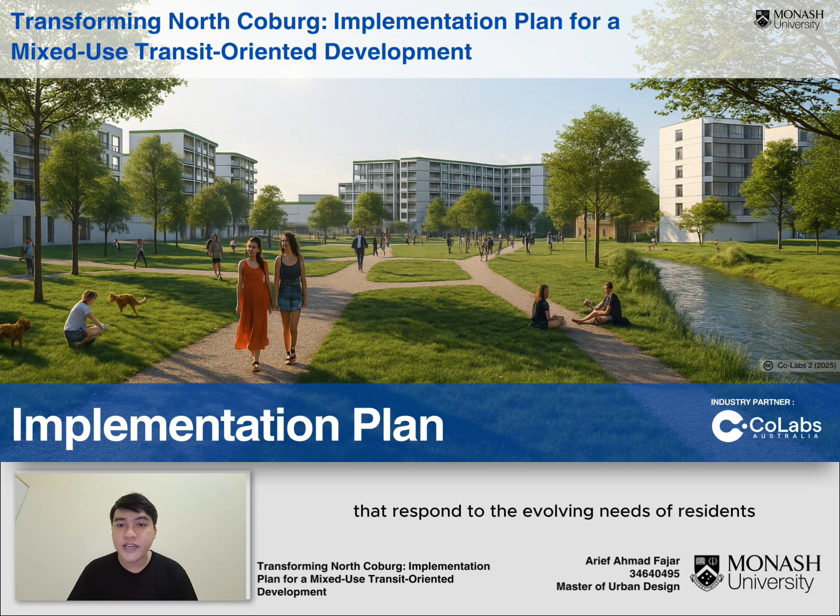Hello everyone. Today I'm presenting my implementation plan for a mixed-use transit-oriented development in North Coburg. This project, developed in collaboration with CoLabs, is not just about buildings, it's about creating a resilient, inclusive, and sustainable urban precinct that responds to the evolving needs of residents, commuters, and businesses.

Let's begin with the problem. In many urban areas, commuting is a daily burden. According to Real Insurance's 2022 report, over one-third of Australians still prefer working entirely from an office, while nearly 30% want a hybrid model. This tells us physical spaces still matter, but they need to be better integrated with our lifestyle. Our project addresses this by creating a place where commuting is enjoyable, not endured.

Our challenge question was: how might we develop a transit-oriented precinct in Coburg North that strengthens physical connectivity, social interaction, and cultural assets? This challenge led us to explore not just infrastructure but also human experience - how people move, interact, and feel in urban spaces.

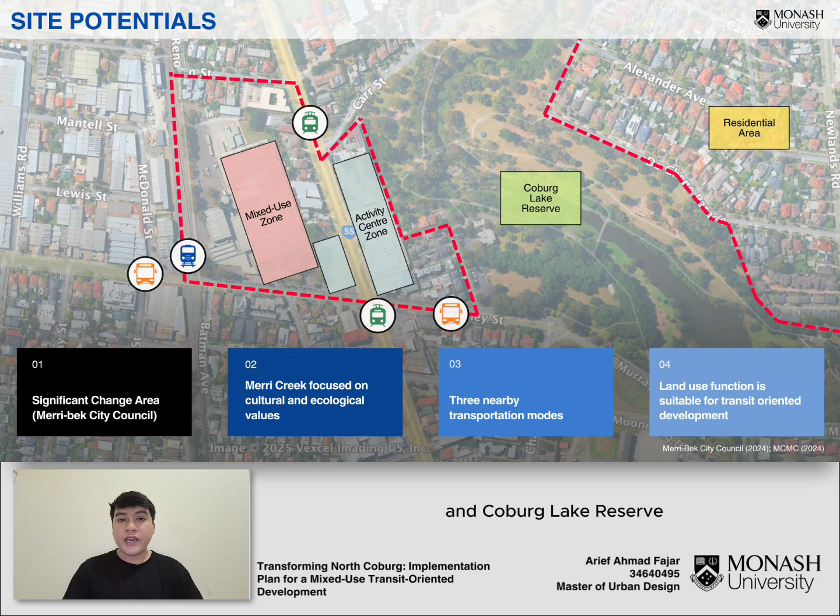The site is strategically located near Merri Creek and Coburg Lake Reserve, with access to three transportation modes: train, tram, and bus. It's zoned for mixed use and designated as a significant change area by Merri-bek City Council. The zoning allows for a blend of residential, commercial, and community uses, making it ideal for transit-oriented development that supports density, diversity, and sustainability.

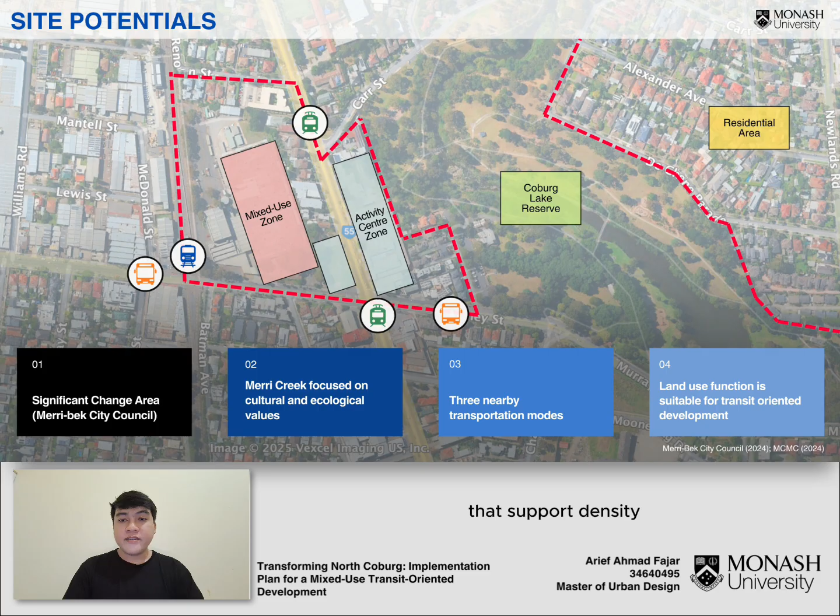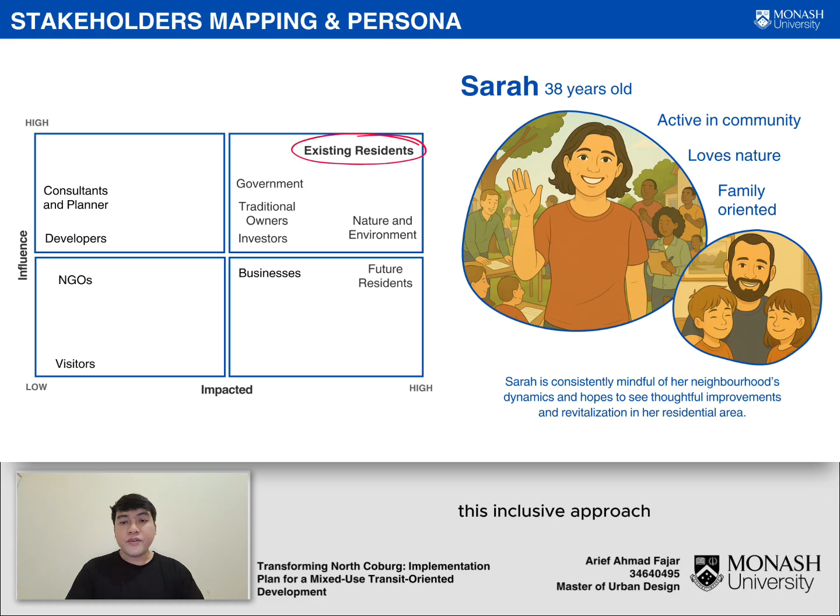We conducted stakeholder mapping to understand who would be impacted and who holds influence. One of our key personas is Sarah, a 38-year-old resident who loves nature, is active in her community, and values thoughtful improvement. Other stakeholders include future residents, businesses, investors, NGOs, traditional owners, and government bodies. This inclusive approach shaped our design and implementation strategy.

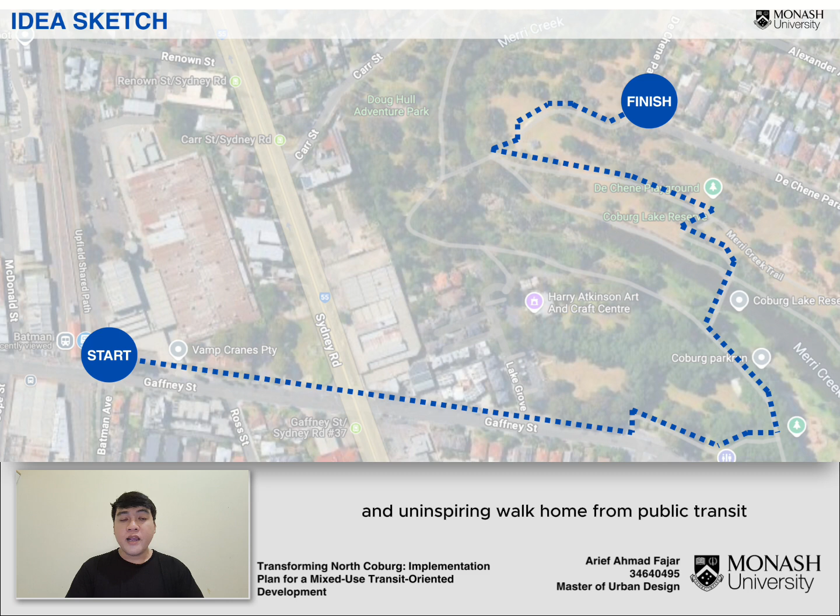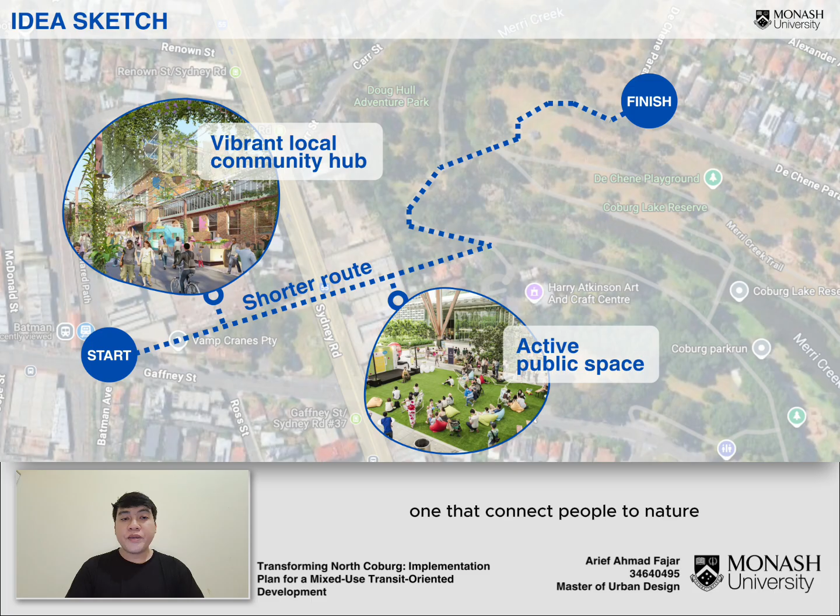Currently, residents experience a disconnected and uninspiring walk home from public transit. Our solution envisions a vibrant, green, and accessible environment that enhances daily life. We want to turn the commute into a positive experience, one that connects people to nature, community, and opportunity.

This is the initial concept sketch. It visualizes the transformation from a disconnected, underutilized area into a vibrant transit-oriented neighborhood. The sketch marks the journey from the starting point, where the site lacks cohesion, to the finish.

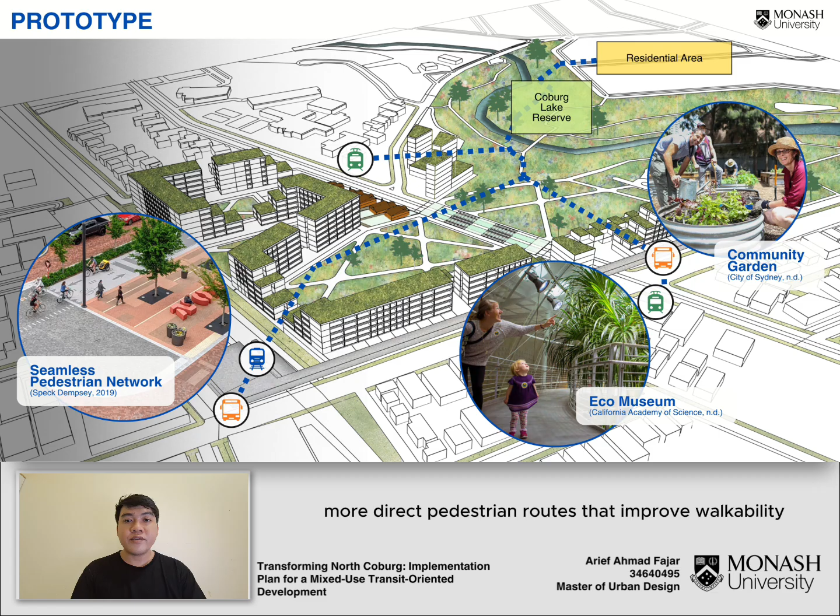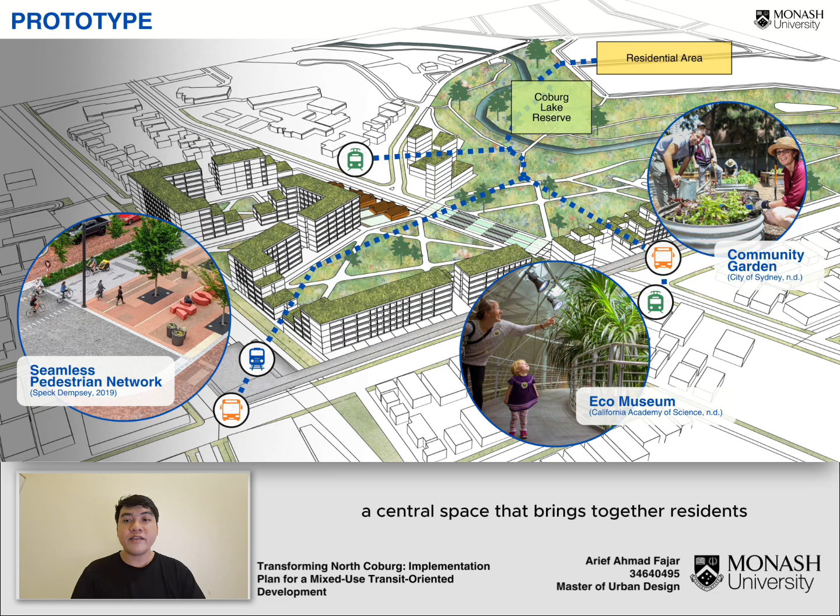Here, we refine the concept by emphasizing two key design goals. First, creating shorter, more direct pedestrian routes that improve walkability and reduce travel time between transit stops and homes. Second, establishing a vibrant local community hub, a central space that brings together residents, businesses, and visitors. This hub will feature active public spaces, encouraging social interaction, local commerce, and community events.

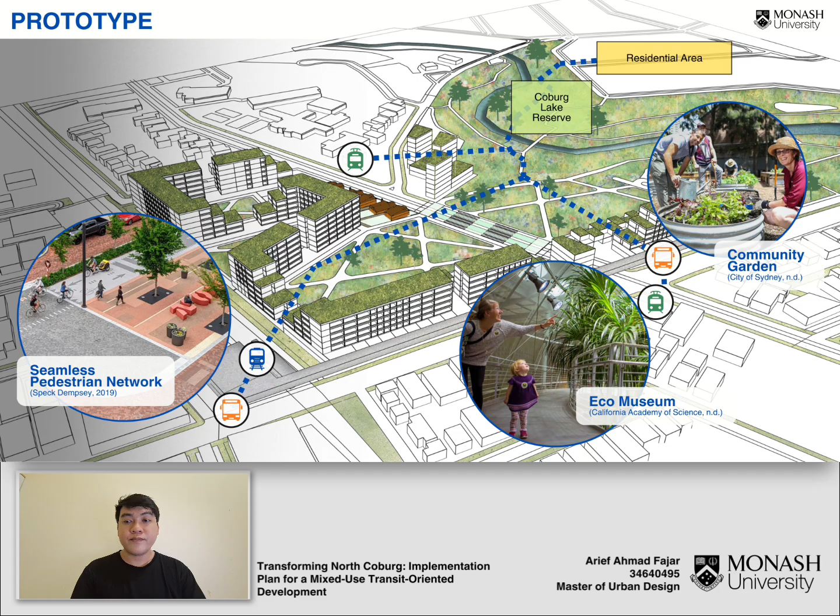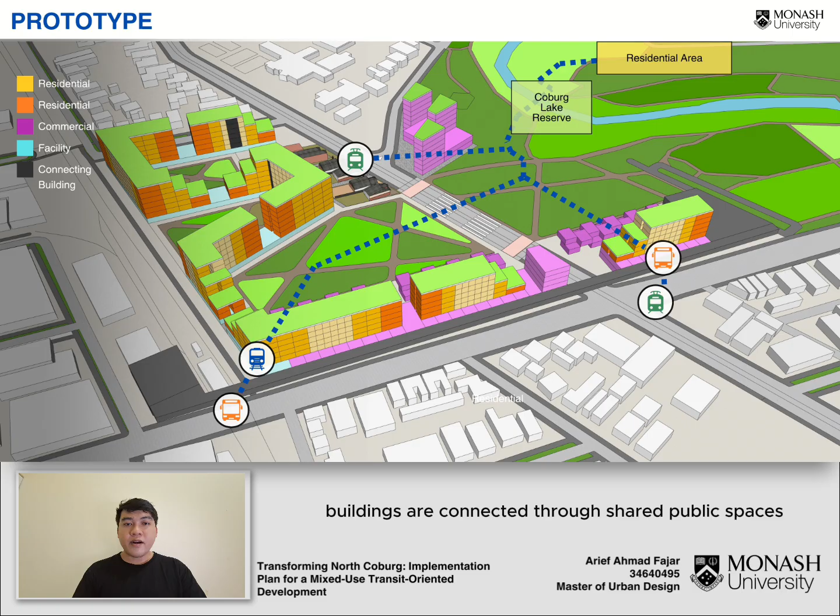Next, this is the prototype layout, which integrates residential, commercial, and community functions into a cohesive urban fabric. Buildings are connected through shared public spaces and pedestrian pathways, creating a seamless flow between homes, amenities, and green areas. Importantly, this design is rooted in transit-oriented development principles.

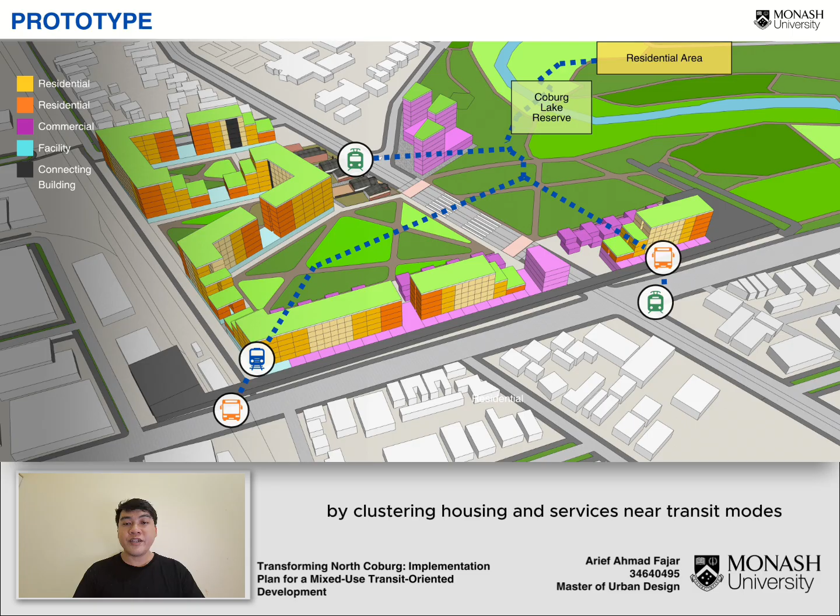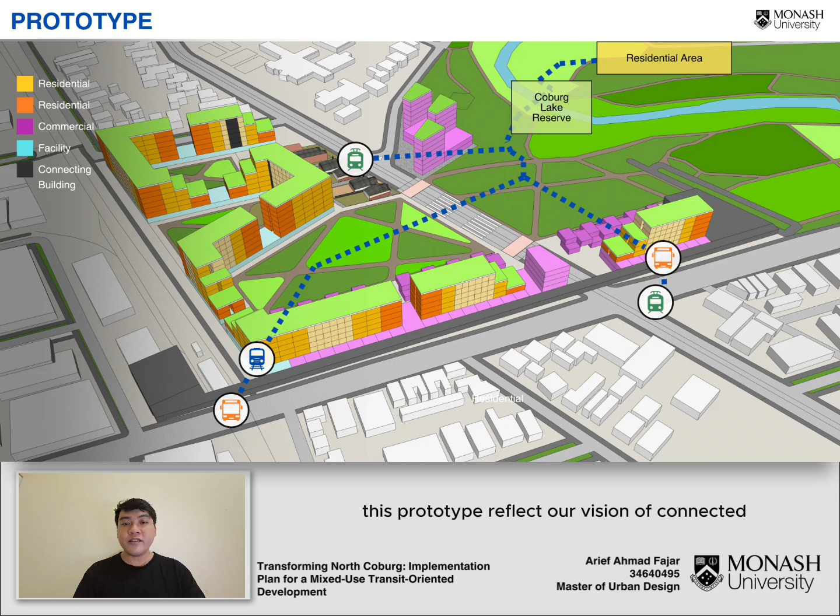That means we're prioritizing walkability, density, and mixed-use planning around public transport access. By clustering housing and services near transit nodes, we reduce car dependency, encourage active mobility, and support more sustainable urban growth. This prototype reflects our vision of a connected, livable, and inclusive neighborhood.

This is our development in numbers. Our proposal includes 830 residential units, consisting of studio, one-bedroom, and two-bedroom apartments. Next is around 13,000 square meters of commercial space, 7,000 square meters of office space, 6.6 thousand square meters of community facilities, and 13.2 thousand square meters of green open space, all within a 45,000 square meter site. This mix supports a diverse and self-sustaining community to become a resilient hub.

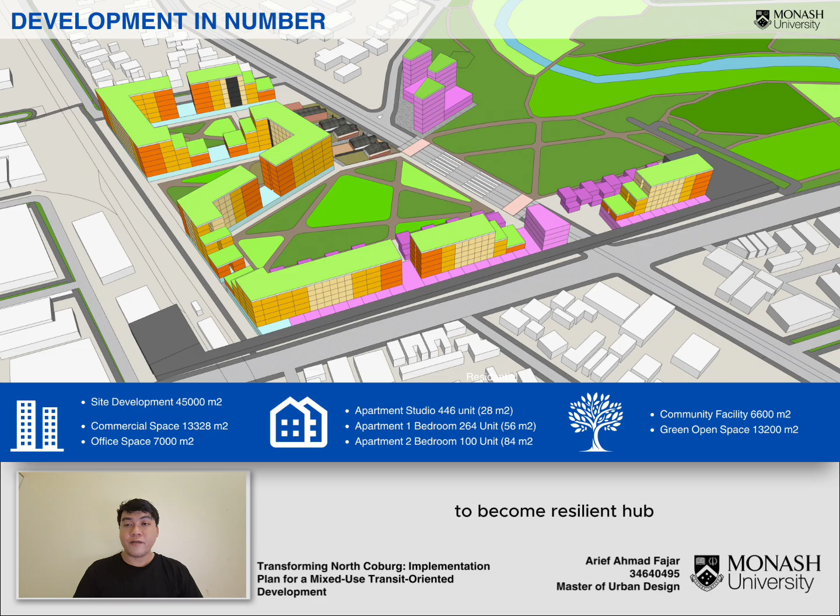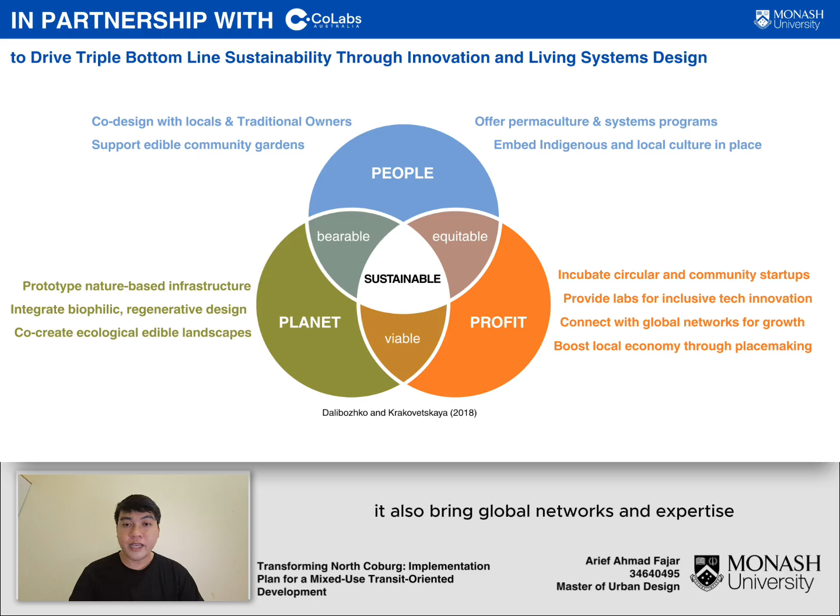Next, the CoLabs partnership. Partnering with CoLabs enables us to embed innovation and sustainability. Their contribution includes edible landscapes, permaculture programs, and inclusive tech labs. These partnerships support circular economy startups, biophilic design, and regenerative infrastructure. It also brings global networks and expertise into a local context.

Now let's look at the overall construction cost of the project. The total hard construction cost is estimated at $182.4 million. This includes all the physical building works across residential, commercial, office, and community facility components. Breaking it down, the residential component, which includes 830 units across studio, one-bedroom, and two-bedroom types, accounts for $101.4 million. This is based on a construction rate of $2.8 thousand per square meter, consistent with current mid-rise apartment construction costs in Melbourne.

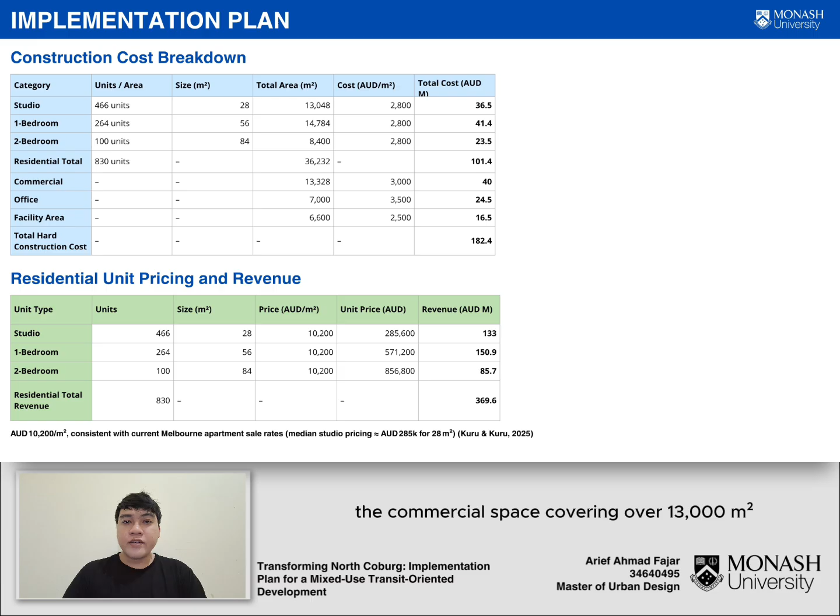Next, the commercial space, covering over 13,000 square meters, is estimated at $40 million, using a slightly higher rate of $3,000 per square meter due to the need for retail-grade finishes and flexibility. Next, the office space at 7,000 square meters is projected to cost $24.5 million, reflecting a premium rate of $3.5 thousand per square meter to meet modern workplace standards.

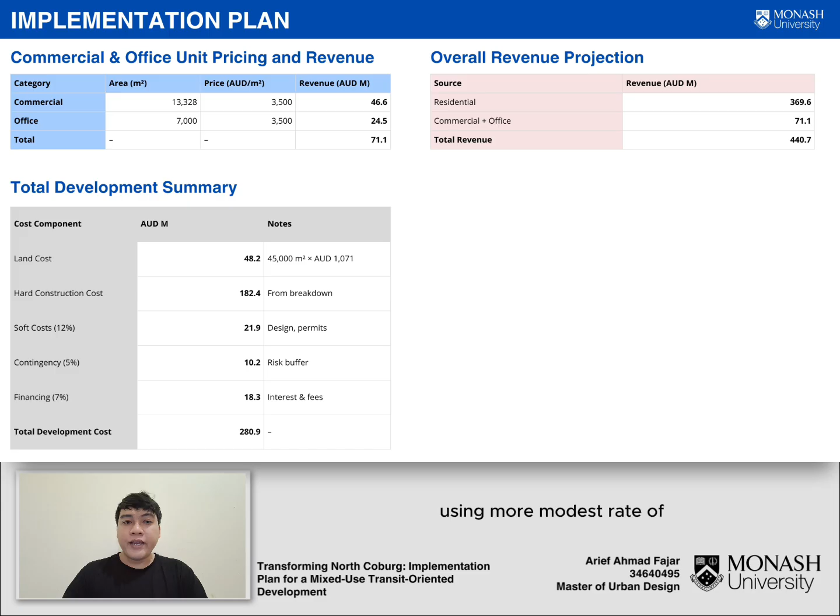Finally, the community facility area, which includes shared amenities and public use infrastructure, is budgeted at $16.5 million, using a more modest rate of $2.5 thousand per square meter.

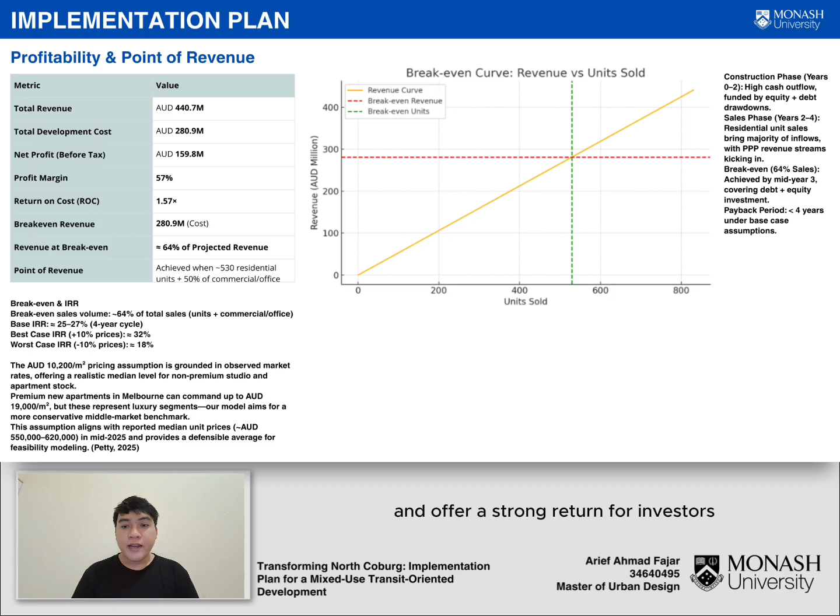With a total development cost of $280.9 million, we project net profit at around $159.8 million. The profit margin is around 57%. The return on cost is 1.57 times, and break-even is achieved at 64% sales. Our IRR ranges from 25 to 27%, with potential to reach 32% in best case scenarios. This financial model is grounded in current market data and offers a strong return for investors.

Next, risk management. To ensure the success of this development, we've identified and addressed key risks. First, construction risk, like delay or cost overrun, is managed through fixed price contracts and a 5% contingency budget. Next is market risk, such as low unit sales, mitigated with flexible pricing and early marketing. Next, financial risk is reduced by securing long-term equity and leveraging our PPP with Co-Labs to lower debt exposure. Next, operational risk is addressed by having Co-Labs manage commercial spaces, ensuring high occupancy and stable revenue.

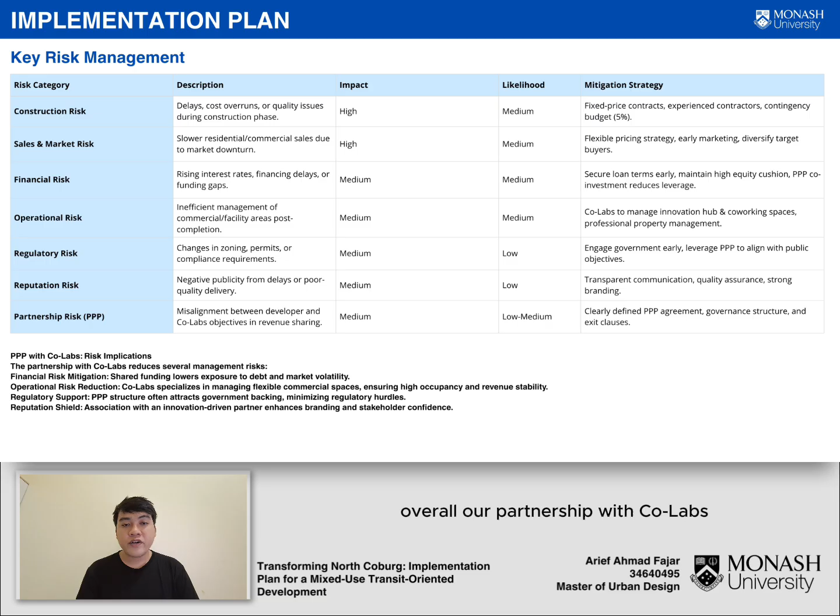Regulatory risk is minimized through early government engagement and alignment with public objectives. Next, reputation and partnership risks are managed through transparent communication and clear PPP agreements. Overall, our partnership with Co-Labs strengthens our position by sharing investment, reducing exposure, and enhancing stakeholder confidence.

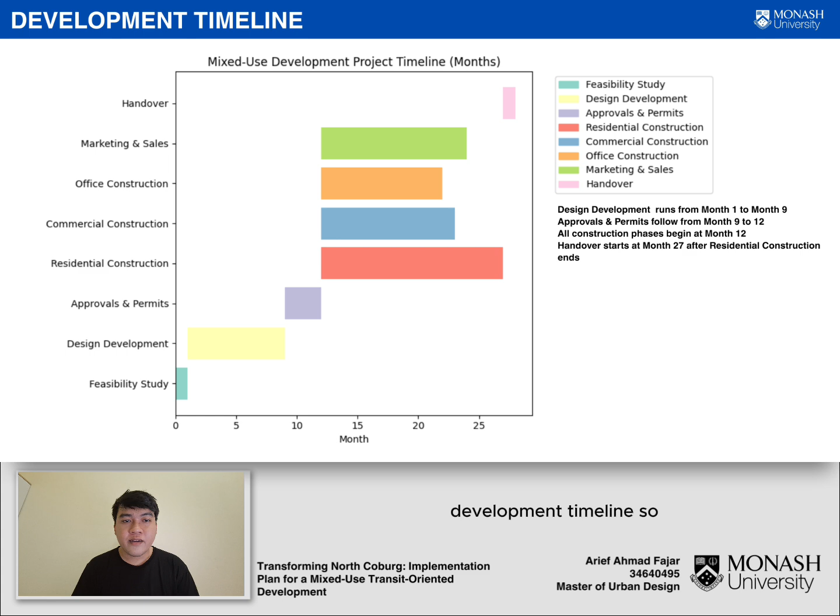Development timeline: the project will take around 27 months from planning to handover. Next, success metrics. To measure the success of this project, we've set clear targets across financial, operational, and social dimensions.

In conclusion, this project is a model for resilient, inclusive, and sustainable urban transformation. By integrating housing, nature, innovation, and community, we aim to create a place where people thrive and the city evolves.